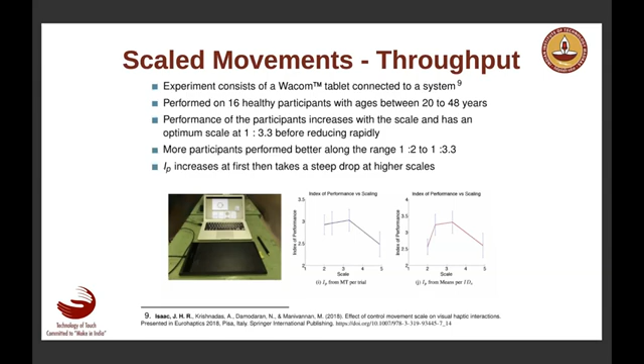We also checked that our performance actually reduces when we move our hands in augmented reality. In certain cases, when you see your hands as well as the virtual hand, real hand and virtual hand together, your performance actually reduces. So irrespective of delay, irrespective of the environment, if you happen to see both your real hand and the virtual hand, the performance is delayed. We call this a virtual kinesthetic conflict, which is a very important guideline.

This is a guideline to avoid seeing the real hand in augmented reality.

The next slide shows scaled down movements instead of scaled up movements. Again, there are some particular scales where we have the optimum throughput.

We also have, similar to the visual, tactile saccades or haptic saccades, which are about 5 milliseconds, where we stop before we go to the next point where we can acquire more information, just like visual saccades.

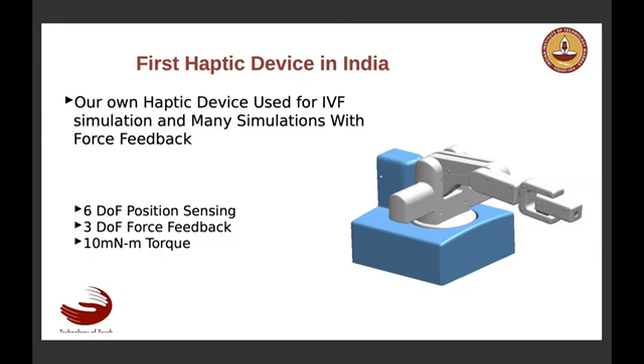All this relates to latency. Latency reduces the stiffness of the object we feel over the internet. So we studied how much latency actually affects the stiffness perception of an object, which we have published. We have also come up with ideas for how to increase the perceived stiffness of the object in a haptics experiment.

We also have displays, laptop or desktop screens, that become tactile, meaning you can touch and feel the textures you see on them. We have methods of converting real laptop and computer screens so that you can get tactile feedback. Combined with 5G internet, this can be useful for the retail market, where before you buy things on Amazon, you can actually touch and feel them first.

Since we understand haptics and tactile perception, just like visual illusions, there are tactile illusions as well. We can make use of these to compensate for latency, network delay, and reliability issues. This is what we proposed in one of our recent papers, which we call a power law based out-of-the-body tactile funneling method for mobile haptics.

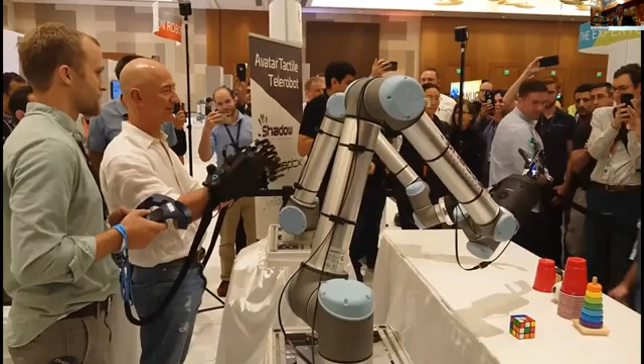The whole thing we wanted to talk about is the last mile communication, and what you see on the screen now is Jeff Bezos. You could see that such a highly sophisticated machine is what you need to build to really execute some of the small tasks that he's doing now. It is also important that you need to interface with lots and lots of sensors at the edges.

So I'm basically concentrating much more on the last mile. It stopped, okay. So the work that we are doing at TU Delft, along with Vineet, who probably spoke about some of the things he's already working on, is to really make tactile internet work without really looking into the network itself. So what are the things which are best done at the edges? Let me move forward.

Usually what they say is you require 99%, 99.999 basically the reliability, and people are talking about 1 millisecond, 10 millisecond latency and things like that. The other aspect is also the bandwidth, because you have so many sensors that you need to connect to get really fine-tuned skill transfer over the internet.

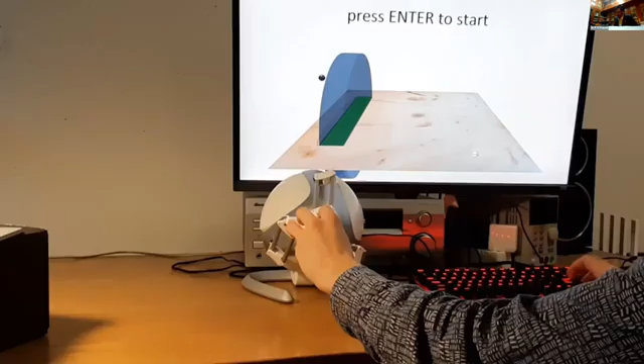So the next thing is about building a prototype. We assume that there are network function virtualization as well as software-defined networking that can provide really guaranteed performance in the core, so that we can have an emulator which can really insert whatever network conditions that we want, so that we don't really need to worry about what will happen inside the core network. So that is one thing that we have taken care of.

So then comes the problems and issues, challenges with respect to the last miles. Our design philosophy is that we think Wi-Fi is going to stay, and newer versions of Wi-Fi are coming into the market, and there are already lots of improvements, and also high frequency communications are already getting into this sphere, wherein you have no problems of bandwidth at the edges. So that means you need to really worry about what will happen if you want to connect the sensors, multiple sensors, and on the other side, actuators to the access point.

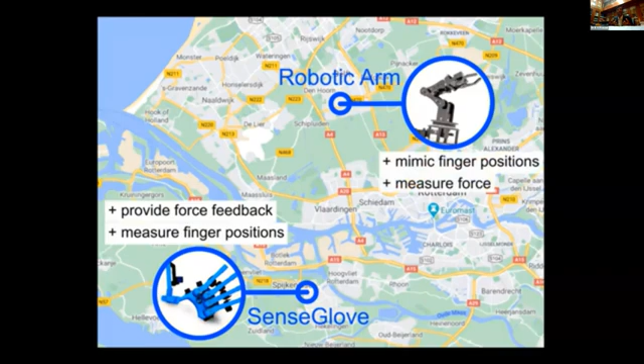So we used a simple glove, it's called SenseGlove, and it produces data only at 60 hertz. You could see that the sensors are also not that really well built for the applications. And the robotic arm has simple, limited degrees of freedom, and also it's not too high actuation speed. But we could really get a good amount of insights into what will happen, or how do you feel when you do things over the internet.

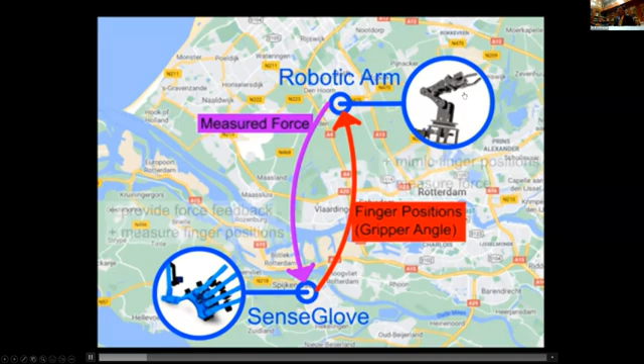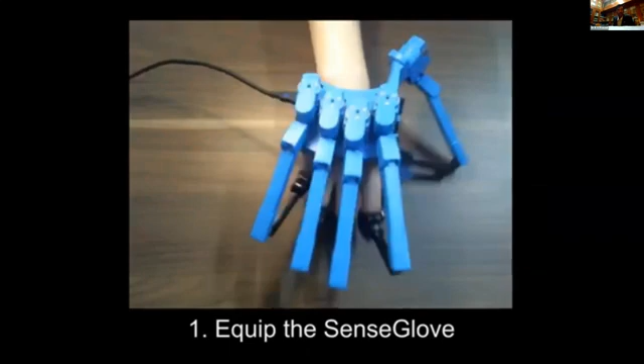So SenseGlove was in Rotterdam, and we have the actuator in our university building. So this is the glove. We are working on making this glove much more fast. So there are a few things that we are doing.

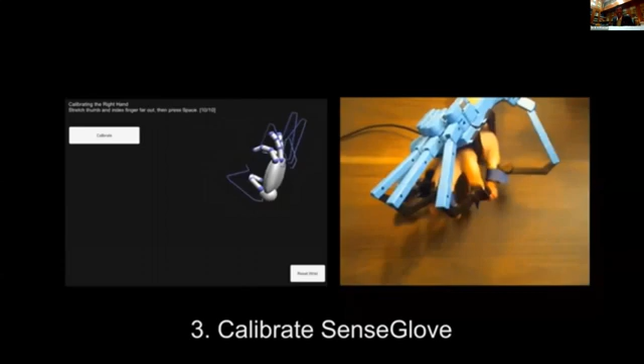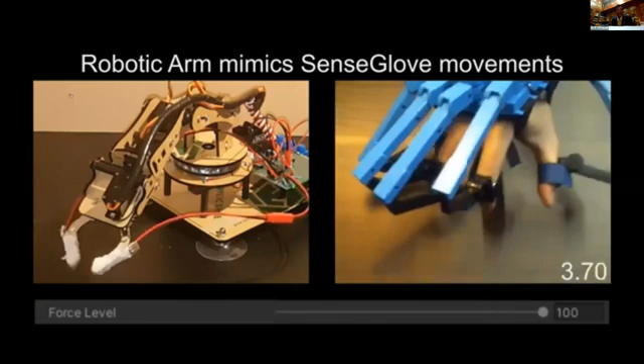So now we connected this with Unity, so that you can really get the virtual environment and rendering in the virtual environment. So maybe let us move. Very simple things that we did with our students as the workforce to also make things really customizable. So this is the video where you see how 2 fingers that we built again is working with the SenseGlove.

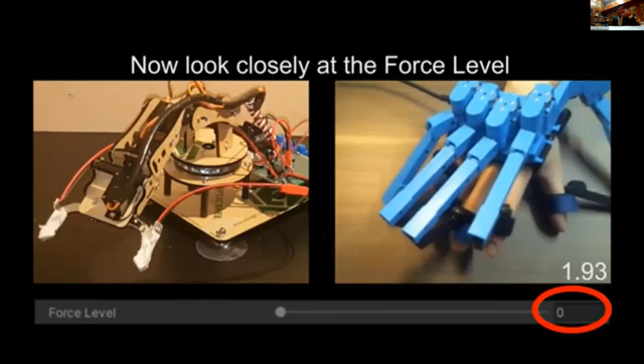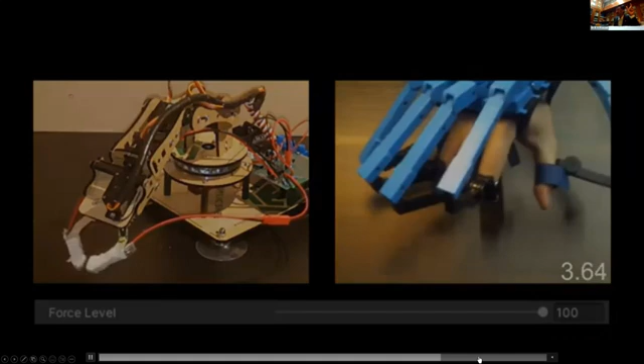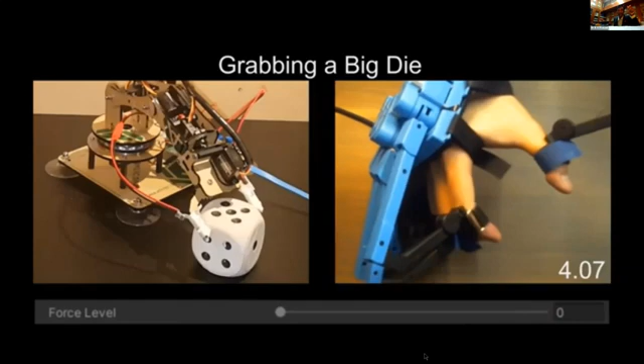We have an advanced version of it, which we are still experimenting and working on. You could see the force level that we are actually also mentioning here. So you can actually hold different objects. That's what you could see here. A big dice, see the separation between the 2 fingers. So that is the force that you're basically giving as feedback to the user.

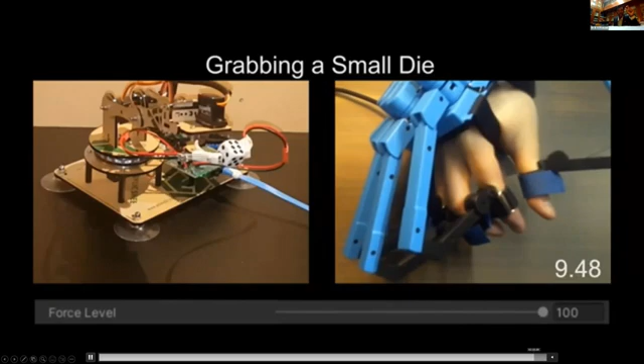And also holding the small one, see the separation between the two fingers with bigger and smaller dice.

So for the last mile, I will try to provide another small piece of work that we did, and it looks promising. It was recently published, and we have shared some simulator code on GitHub, basically my colleague Vineet Gokhale's code.

So the idea is that we have a very high bandwidth last mile communication, for example Wi-Fi 6, Wi-Fi 7, and others. Can we do something better, evaluate the performance, and then improve it further?

The other simulators that we tried to use were not really complete, and that's why we built this whole system. Something that we found out is that if your first packet is delayed, the delay will start cumulatively increasing, and then you're not able to provide good service.

There is also going to be some frame aggregation, because you're not going to have a different flow for each sensed data, since you'll be getting very few bytes of sensed information. You don't want to add too many headers and waste bandwidth, so the best thing is to do frame aggregation.

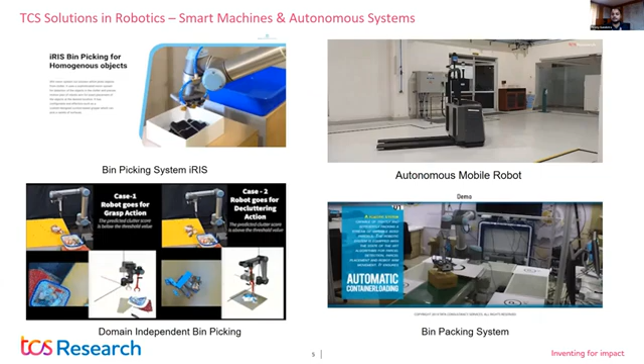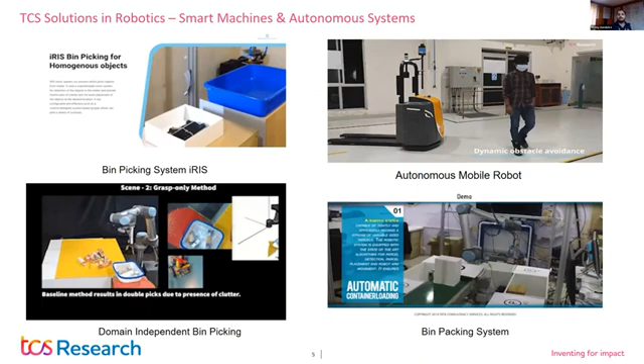We also have a bin packing algorithm, shown on the bottom right. We can perceive the pose of an object and then identify it in a confined space - like you can see the white boxes, it's a confined space. We wanted to use a packing algorithm that maximizes how we can place objects inside it, so that the packing efficiency would go higher. So all these solutions are motivated by our clients' requirements, and then we have built them.

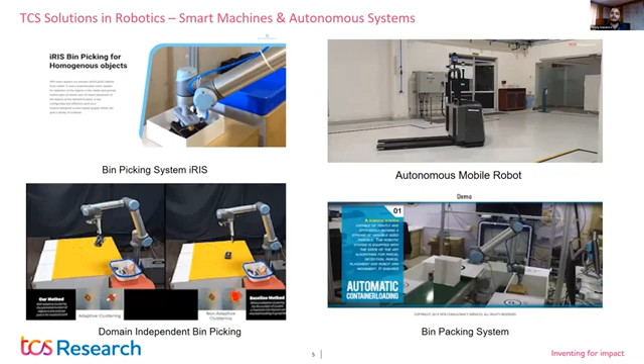So moving on, across all of the solutions, the core architecture that we followed is very relevant to academia as well, if we want to develop a good system or a POC. These are some of the components that I want to emphasize here.

So we build all our systems based on ROS. ROS is the one which kind of interfaces with the hardware and the software. On the hardware side, we can have manipulators, mobile manipulators, sensors - we have vision, laser, IMU, and tactile. In the end effector, we have different kinds of modalities like suction-based, finger-based, and soft gripper-based. So these are the hardware parts, and these components need to communicate with one another or with the software using ROS.

So the idea here is either to get an API, a ROS API, for this hardware, or if we have to use their own proprietary APIs, we create a ROS wrapper. So this is the common practice that we follow.

Coming back to the software intelligence part, we have a robotics controller, which is basically the core mind of the software. The controller can be state machine based, where how a task is executed end to end is controlled by the controller. Each and every subcomponent will be a state, and the controller should decide which one to call in order to execute a task.

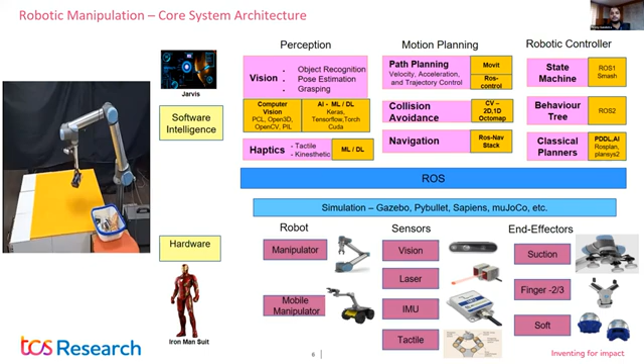So one important point: if we want to test a system faster, instead of going directly to hardware, we can create a simulation layer where we can test the software quickly, and determine how feasible this stack will be in a short span of time. That's the architecture we follow for all our development, and it's very relevant for academia in order to develop a POC and other things.

Now we'll talk a little bit about the robotic perception side. We try to create visual perception, and we use these perception capabilities, algorithms, or software in our solutions to solve a task.

First is object recognition. This is basically to localize an object in 3D space and then pass this information to a manipulator so it can go and grab the object and perform manipulation. Initially we used to do 2D object detection and instance segmentation on an image plane, then use that information to get back to 3D data in order to localize the object in 3D space. That's the common approach we used to follow in the beginning.

Later on, this method also worked very well for a range of applications, but we tried to extend this using a 3D instance segmentation based approach. In certain cases, with 2D detection results, when we look at the corresponding 3D points, due to sensor issues we sometimes don't get those points properly. So in the same ROI, we may get points belonging to a different object. We tried to build robustness into this kind of system.